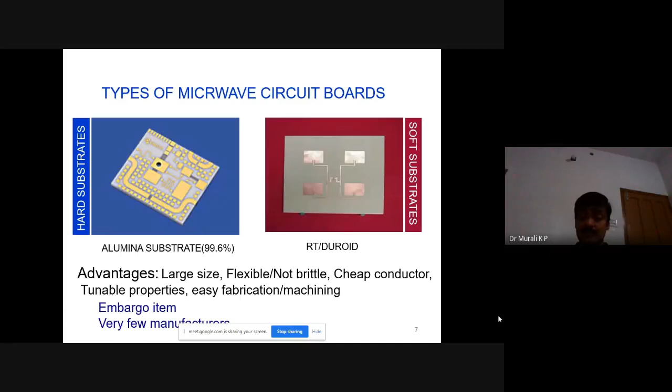And as I was telling in the previous slide, it is an item under embargo, and very few manufacturers are available for these kinds of high-end substrates. I'm talking about high-end microwave substrates, which are used for strategic applications. Typical applications of these high-end microwave substrates are satellite communication, mobile communication systems, wireless local area networks, GPS, and

now we can see that driverless automobiles are upcoming, like Google or Tesla. They are developing driverless cars, and in that they use different kinds of sensors. All those sensors, I think, will be working at a frequency of more than 77 gigahertz. And when 5G comes into the picture, there will be a lot of applications, because 5G is not going to be in mobiles only. It will have immense applications in all other areas. It will not be confined to mobile phones. That is damn sure. So a lot of applications will come for this kind of substrate.

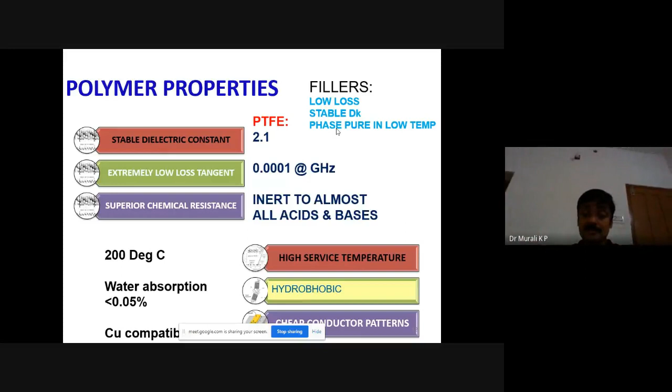Another thing is we can model the dielectric constant according to the final dielectric property you want, and accordingly how much volume percentage of filler has to be incorporated in the polymer matrix. There are several models based on polarization mechanisms, particle size, etc. So if you want the effective dielectric constant, based on the polymer and the volume percentage of filler incorporated in it, without doing experimental work we can roughly calculate it using this theoretical modeling.

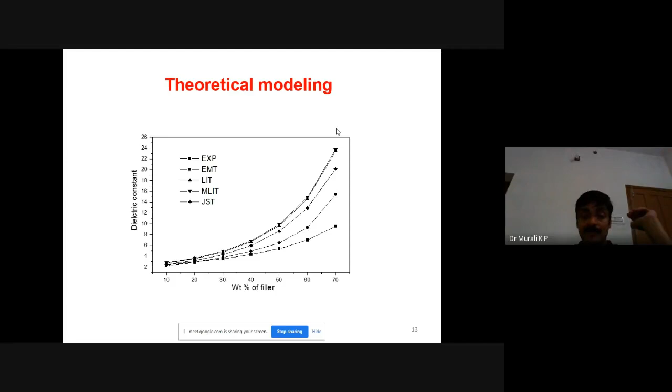Another thing is, then you may ask, what is the difficulty in fabricating a substrate? Just simply put 10% of one ceramic in a polymer, make a sheet, a substrate kind of form, then automatically it's very easy. No, it is not at all easy. You have to consider all these parameters, because you simply cannot add a random volume fraction into a polymer and make a substrate. Impossible.

Because first, see, there is an optimum filler loading in all cases. As I was telling you, you just can't add a random volume percentage. There is an optimum filler loading in every matrix which gives a polymer based ceramic substrate, I mean, microwave substrate. So why? I will answer the question. Because there is a coefficient of thermal expansion.

If you take any polymer, most polymers will have very high thermal expansion compared to that of the copper which is going to be cladded on the polymer. So unless the CTE is matched, there is every chance that copper will get peeled off during operation of the device. So in order to match the thermal expansion of the polymer composite with that of copper, we have to control the filler volume percentage or fraction in the polymer matrix.

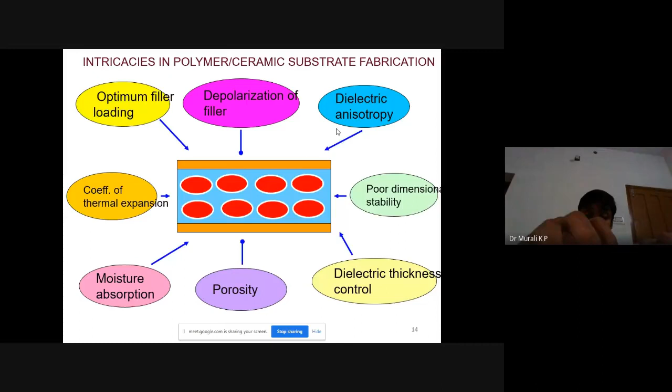So we should disperse the ceramic inside the polymer matrix to such a level that we end up with a CTE matching that of copper or whatever conducting layer you use. That is very important. So there is a restriction in the volume fraction of the ceramic. Next one is moisture absorption. Moisture absorption is related to porosity.

So if you want a very high dielectric constant substrate, you just can't fill a very high volume fraction, because once you cross a threshold level, it will create a lot of porosity in the composite, which will lead to moisture absorption and weaker mechanical properties. Its strength will come down. So that is another point to be taken care of. And then dielectric thickness control, I was telling about the tolerance in the thickness level.

And poor dimensional stability, because dimensional stability means with respect to temperature cycles, the dimension should not change. So that has to be taken care of. Then dielectric anisotropy, which is very important, because if the dispersion of the ceramic in the polymer matrix is not uniform, then the dielectric properties, epsilon r and loss, will vary at each point; it will not be homogeneous. That can create problems when you design a circuit on it, like fringing capacitance, if you don't disperse the ceramic uniformly.

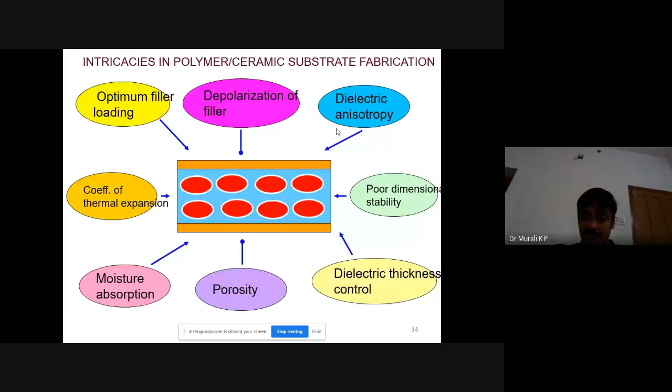Then of course depolarization of the filler, because what actually gives epsilon r is the polarizability of the material. Ceramic has a very high dielectric constant compared to polymer. So when the polymer encapsulates the ceramic, it is getting depolarized. That depolarization has to be controlled, so the ceramic has to be uniformly dispersed. Otherwise, depolarization will be different in different parts of the substrate.

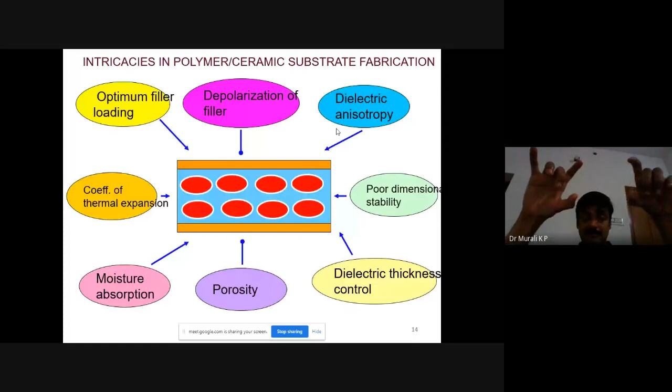So that is why for each polymer and the corresponding ceramic filler, there will be an optimum filler loading which you have to find out for getting the substrate with required properties. As you know, the ceramic filler is our intellectual property which we can vary. Once the glass fiber and polymer are fixed, we can tune the electrical or substrate properties using our ceramic filler.

And how can we fabricate this? The starting point is how the filler can be prepared. The filler is prepared by the pure conventional ceramic solid state route. According to the final composition, take the stoichiometric ratio of the raw materials, mix it, dry it, then calcine it at the required temperature, then grind, then do XRD to check whether the phase has formed. Otherwise, grind and take it to higher temperature. We follow the conventional solid state route.

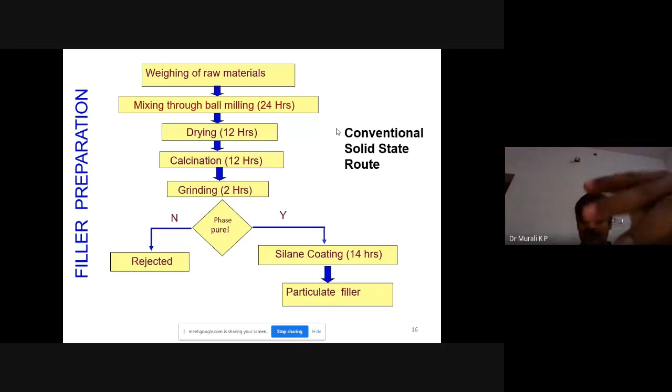And once the XRD shows phase purity, we can take it for dispersing in the polymer matrix. So generally the solid state route is followed for the synthesis of the ceramic filler. If you want to control the particle size below a certain size, we can go for a chemical route also. But generally for these kinds of microwave substrates, the solid state reaction route is more than sufficient.

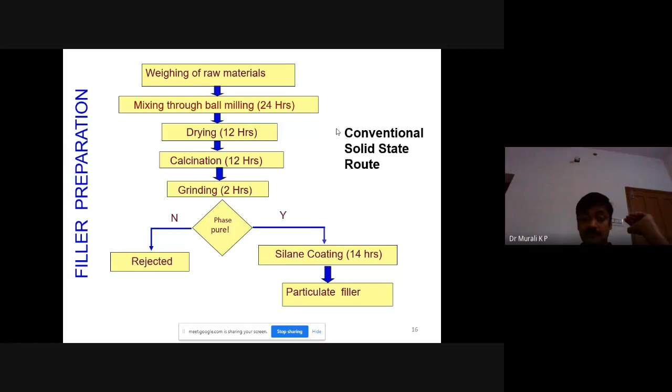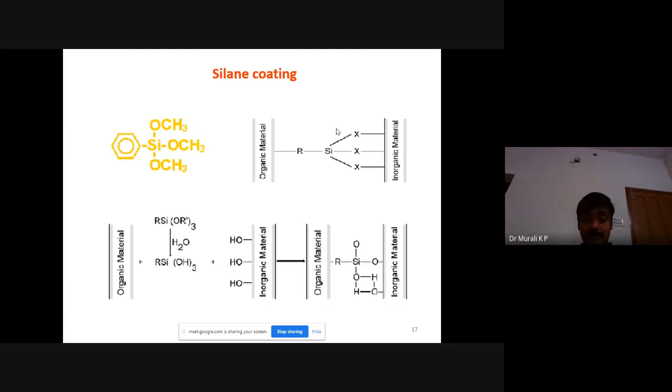And as you know, most of the ceramics are hydrophilic in nature. They will have a tendency for water to be absorbed. I have already told you what the adverse effects are if the material absorbs water: high loss tangent, low mechanical strength and all. So we have to preclude its hydrophilic nature. So how can we preclude the hydrophilic nature? It is done by using silane coating.

Silane coating is a process that can control the interface, because in a composite there is an interface between the ceramic filler and the polymer. The property of that interface is very, very important in deciding the final properties of the composite. So how can we make it stronger? Silane coating is one of the options to make it very strong.

What it does is, a silane can be chosen according to the application; it acts as a link between the polymer and the filler, between the organic material, which is the polymer, and the inorganic material, which is the ceramic. If you take any silane for this application, we can call it a head and a tail. The tail, as shown in the picture, will react with the OH of the ceramic material, and it will form an SiO coating over the ceramic material. So it will become hydrophobic.

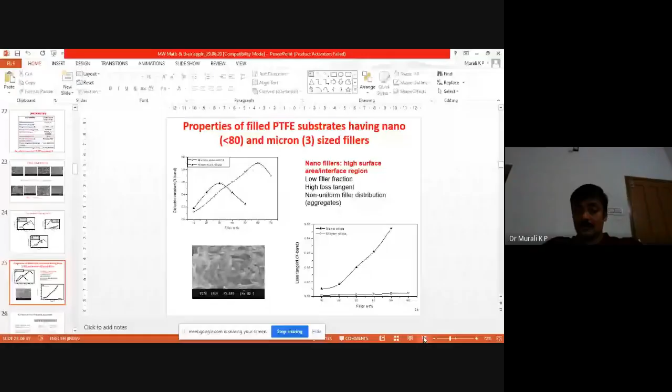Okay. So what I was telling, nano size fillers are better to avoid when you fabricate a microwave substrate. Now the characterization techniques, just to mention: phase purity of the ceramic filler using XRD, chemical purity using XRF, particle size of the filler because it is very important, dielectric parameters using the waveguide cavity perturbation technique, microstructure using SEM, and DSC, TGA for volatile content, melting point, or filler content of the polymers.

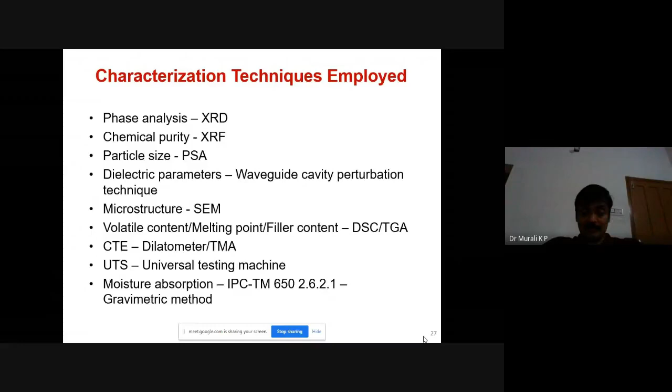Another very important thing is how to clad, because most of the polymer materials are highly inert, so it is very difficult to stick a metal on them. So there are two techniques used. First, we can surface modify the polymer. In the case of PTFE, we attempted chemical etching as well as plasma etching.

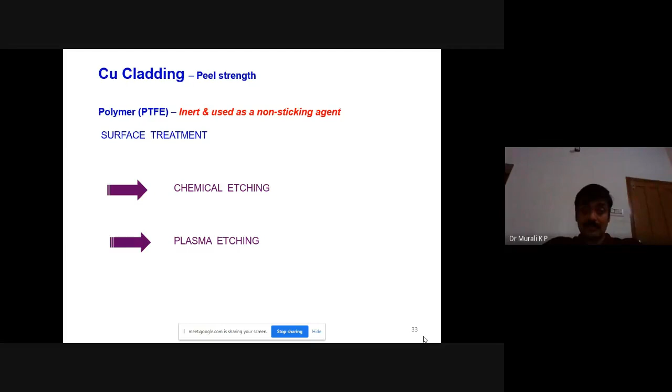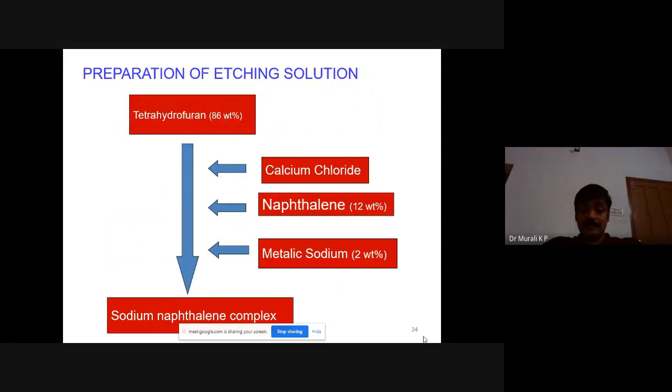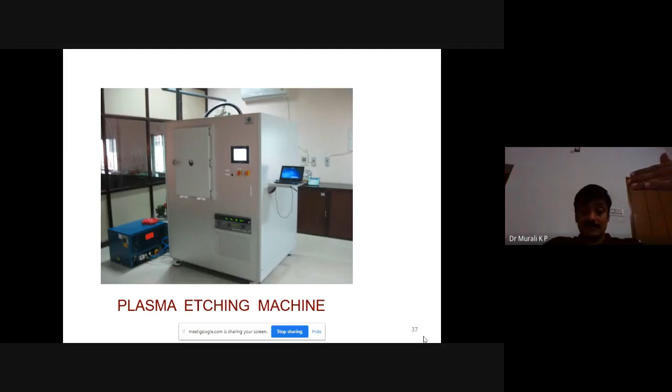Another process which is industrially accepted is the plasma etching machine, an RF plasma etching machine. We can generate plasma using different combinations like hydrogen nitrogen or CF4 oxygen mixture, and the surface can be etched.

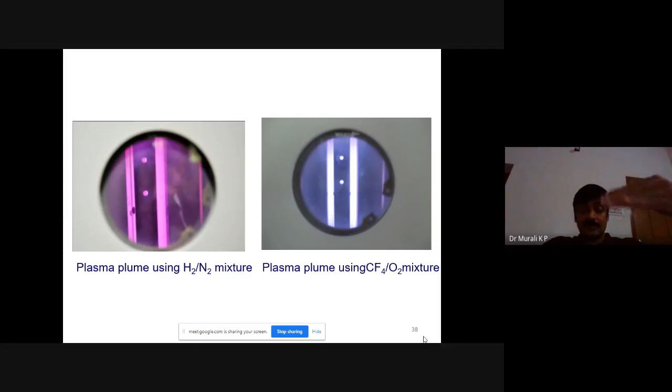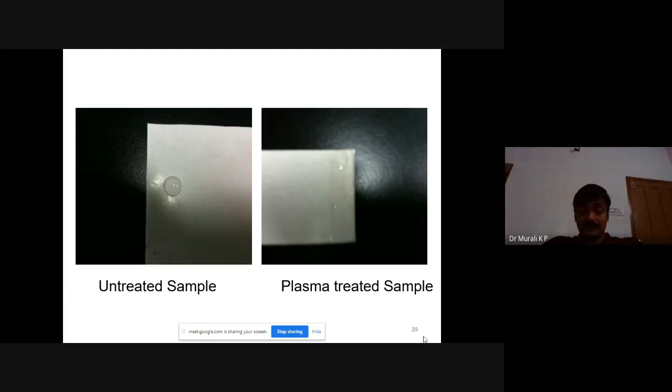Once the surface is etched, how to test that? Just put a drop of water. In the case of the etched sample, it will spread. The other one, it will just stay like a drop because the contact angle is very high. So scientifically, we can prove that by measuring the contact angle: for the etched samples, the contact angle will be less compared to the unetched sample.

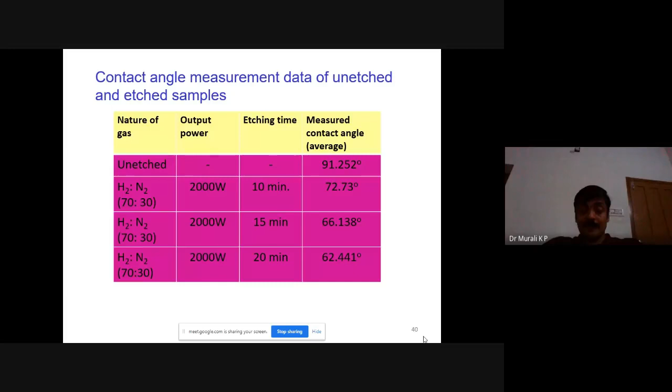Then how to clad the surface-modified substrate? Oxygen-free copper sheet is available from the market. We can go for vacuum lamination. Take the temperature just above the melting point of the polymer, so that the top and bottom layer of the substrate is getting melted, and apply pressure with the oxygen-free copper sheet, so that it will adhere, or get fixed onto the dielectric part, so that we will get the final substrate. This is a photo of the final microwave substrate.

Now the peel strength, the adhesion between the copper and the dielectric, is very important, especially when it is used for high power application, because a lot of heat will be generated, and there is every chance that it will get peeled off. So adhesion is very important. That is why the etching process is also very important.

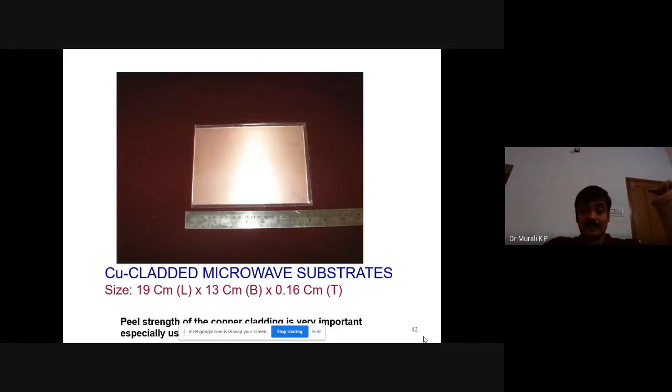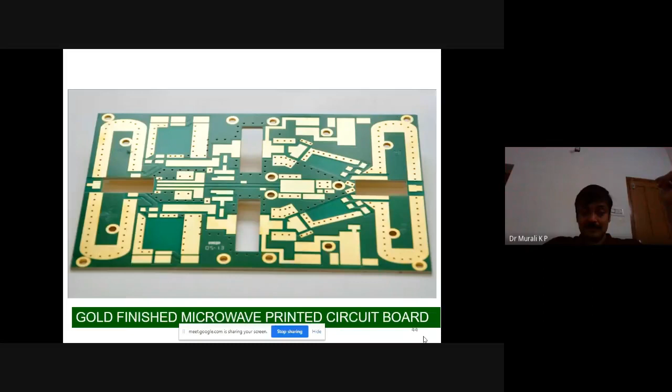In the production process, what we did is we made a bigger substrate. For each piece, we cut samples from all the sides and measured its dielectric, thermal and mechanical properties. And the center portion is given to the third party for their application. This is the final product, a circuit after designing the circuit on a substrate. On this we can fabricate microwave devices like patch antennas, power combiners, filters, etc., according to the requirement.

So in this case, as I was telling, we were able to enhance the dielectric constant from 10.2 to 14.8 as shown in the chart. So what is the advantage of increasing the dielectric constant? When we make an antenna, we can reduce the size, we can miniaturize. So almost 31 to 32% we can miniaturize since the dielectric constant has increased.

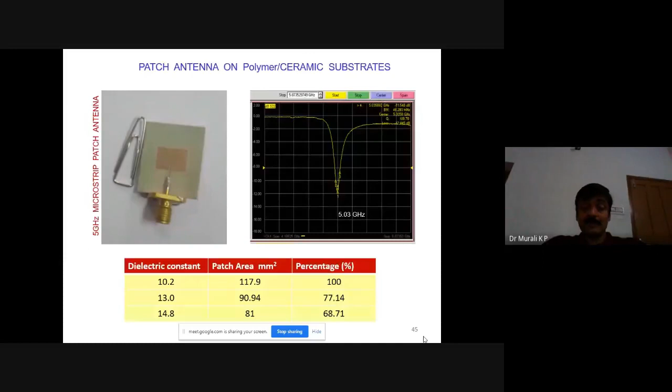Now we'll move to another new topic, magnetodielectric substrates. Whatever we have talked about till now is dielectric substrate, which exhibits electrical properties. This will exhibit magnetic properties also. So materials have to be chosen in such a way that they exhibit epsilon r as well as mu r, so permittivity as well as permeability.

I will tell the advantage, why we are going for this kind of MD substrate, in short form, because this will give more miniaturization without affecting other parameters. That is very, very important. I will tell how it is done. And these are the applications: remote control, all low frequency applications. I will tell why it is applied only in low frequency.

So for magnetodielectric materials, the advantage is: a dielectric material will have an epsilon r value, and being a non-magnetic material, mu is considered as 1. Whereas for any electromagnetic circuit, the miniaturization factor is root of epsilon r mu r. So if mu r can be given some value, more miniaturization is possible. And bandwidth, just see, bandwidth is proportional to root of mu r by epsilon r.

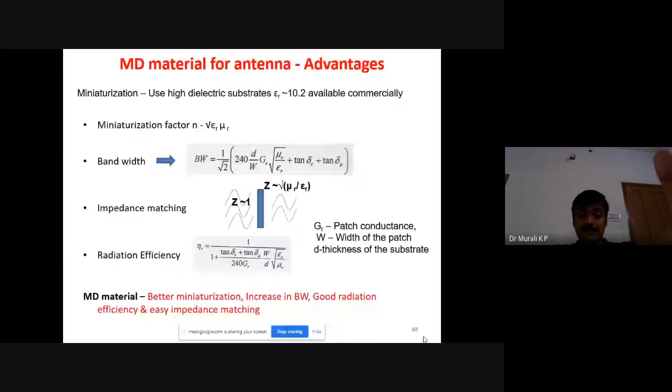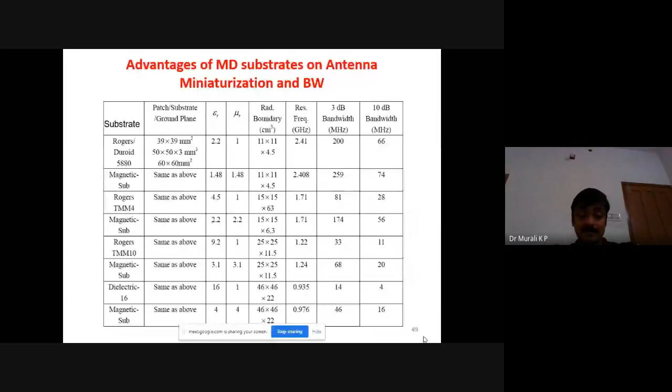But see the last column, enhancement in bandwidth, it is almost 4 times. 4 times enhancement in bandwidth can be seen. So that is the advantage if you use magnetodielectric substrates in place of dielectric substrates. So then I will tell you about magnetodielectric materials, what are the advantages and disadvantages.

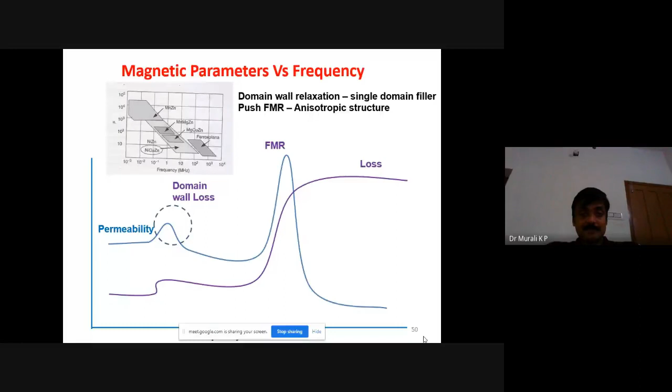So materials for substrate applications should have low electric and magnetic loss and high FMR. The disadvantages of different materials are: if you take metal, it will have low FMR, high eddy current loss, high loss tangent, and high density. If you go for spinel ferrites, nickel zinc ferrite or something like that, it will have operating frequency less than 100 megahertz, high density and high loss above 100 megahertz. So it can be used only in the very few megahertz range.

And garnets and hexaferrites, although they show very high FMR, ferromagnetic resonance, electrical loss and density are high. So what we are proposing is a composite polymer, wherein these fillers are filled in. So what are the advantages? It will give high resistivity, which means low electrical loss, and high frequency stability, high FMR we will get.

And tunable properties: we can tune the properties by making a magnetically anisotropic structure, so that we can push the FMR to high frequency. And we can play with the particle size. And being a composite, it can be processed very easily. So the first set of materials proposed for this is metal polymer nanocomposites. The core will be metal with an oxide layer, and that core shell structure will be incorporated in a polymer matrix.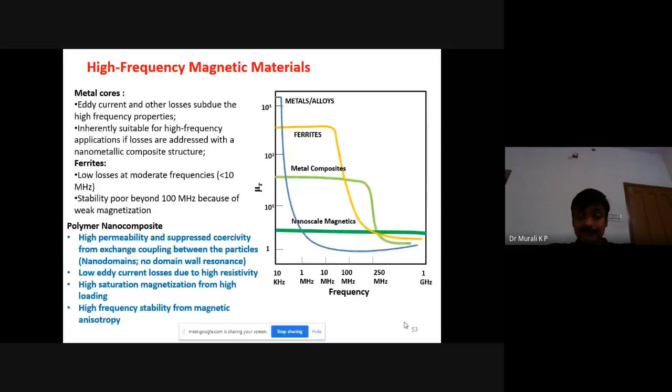These are the materials which can be taken for these applications at different frequencies. To enhance the frequency stability and reduce the loss, these are the strategies we can take. First, reduce the particle size below the single domain size, because once you do, there won't be any domain wall resonance. And reduce the particle size to a level where exchange coupling will increase. That can enhance Ms, saturation magnetization, as well as initial mu.

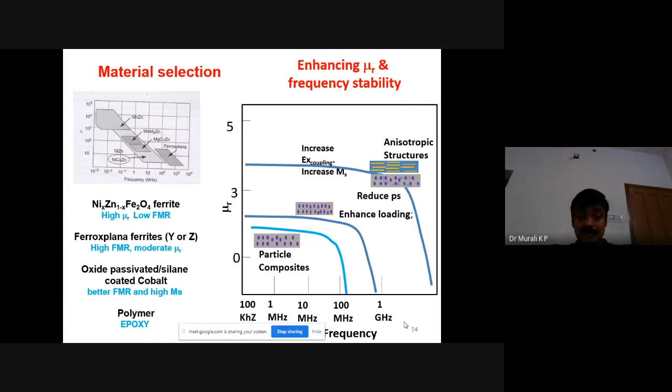It will increase the... that field will enhance the change of the easy axis of magnetization to hard axis, and it will impart more mu, because even after removing the magnetic field, it retains some orientation, so that it will enhance the initial permeability compared to a random orientation. So this is called introducing anisotropy in the composite.

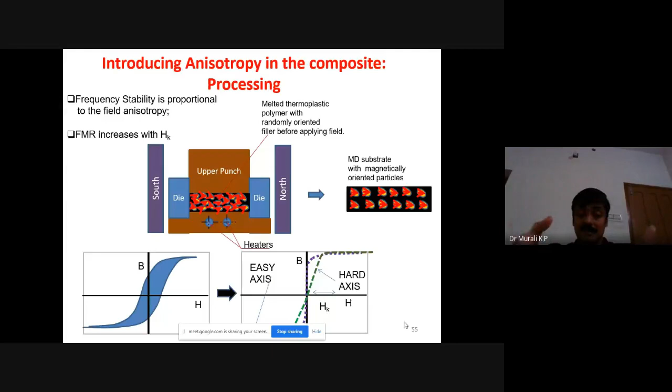So field alignment will enhance the oriented particles in the composite, which will enhance the permeability. So in this way, we can enhance the frequency stability as well as the starting initial mu of the material. And since it is incorporated in a highly insulating polymer, electrical loss will be very less. So we will have all the required properties like high mu r, high dielectric constant, low loss.

So we can fabricate magnetodielectric substrates. The problem is still FMR cannot be pushed beyond a gigahertz range. It is very difficult. So research is going on to push the FMR and the usable frequency range beyond 3 gigahertz. Once the FMR is pushed beyond 5 gigahertz, almost all commercial applications can use this, like wireless communication. So that is a major research going on in this area.

At present, I think the usable frequency has been pushed up to 1 gigahertz only, and these are the applications like NFC, near field communication or far field communication antennas, VHF, UHF radio communication, etc. You can see that it is in the range of 600 megahertz, 500 megahertz, or even less. And another very important use is medical telemetry or hyperthermia applications.